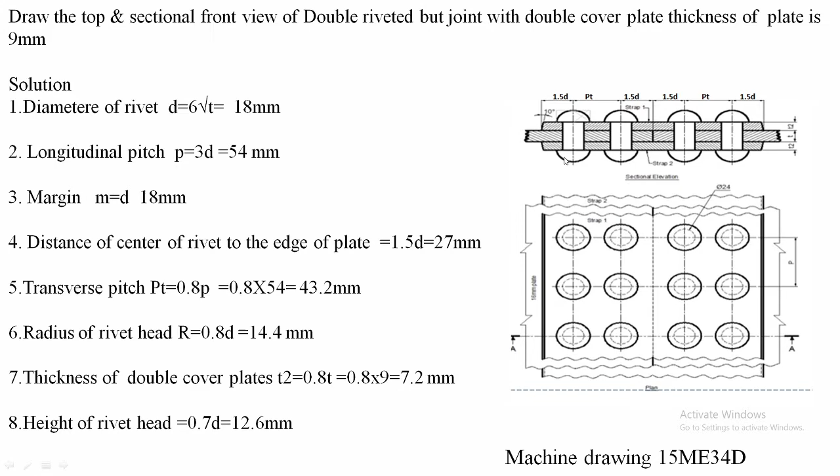The remaining things, such as the diameter and the distance from the center of the rivet to the edge of the plate, 1.5 d, remain the same. So let me discuss how to do it in the drawing sheet. Start with the center line. Now you have to draw the 1.5 d distance. This is the center of one rivet here. So 1.5 d, you draw another line here. That is the distance from the center of the rivet to the edge of the plate from the first rivet. So I draw a line at distance 1.5 d, that is 27 millimeter in our problem.

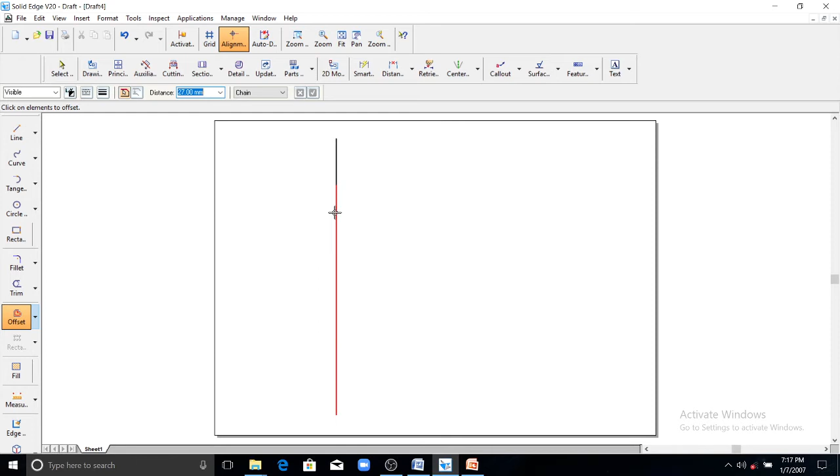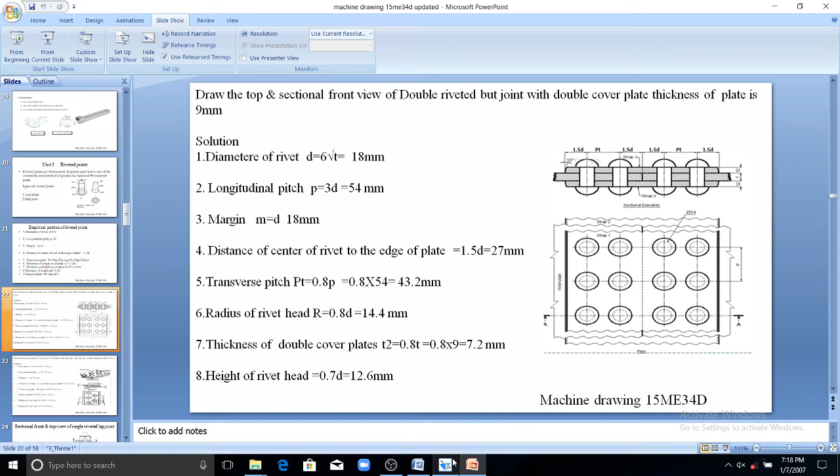From this center you need to draw another line at a distance PT, that is the center of the second rivet in the same plate. So draw another line at a distance PT, that is 0.8 p. We got it as 43.2 millimeter. So 43.2 millimeter, like this line here. Now after that, another 1.5 d distance here, that is 27. So this will complete one side of the plate.

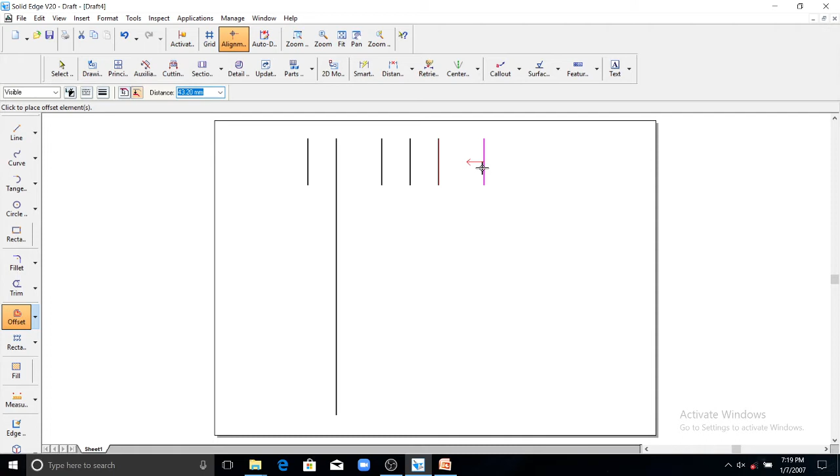So the next plate will start from here. The distance from here to the next rivet center is 1.5 d. So offset it by 1.5 d, 27 millimeter. This line, this side, and after that you have the PT distance. This is the center of the second rivet here, and another center at a distance of 0.8 times the pitch, that is 43.2 millimeter, you can see here. After that, draw another line at a distance of 1.5 d, that is 27 millimeter.

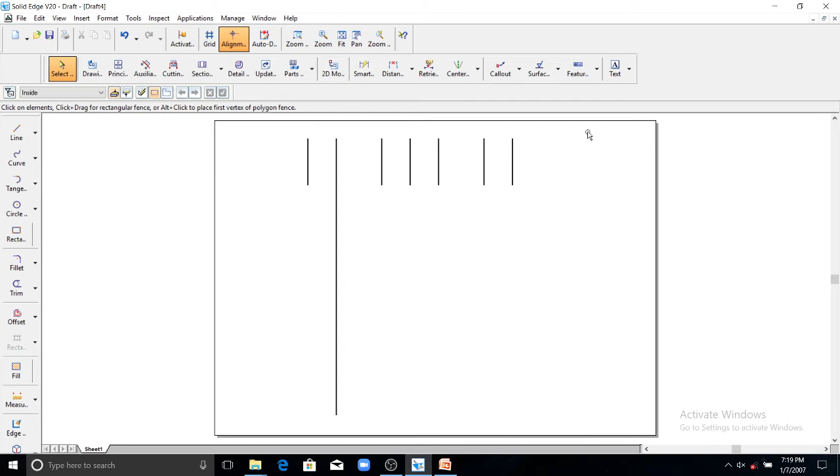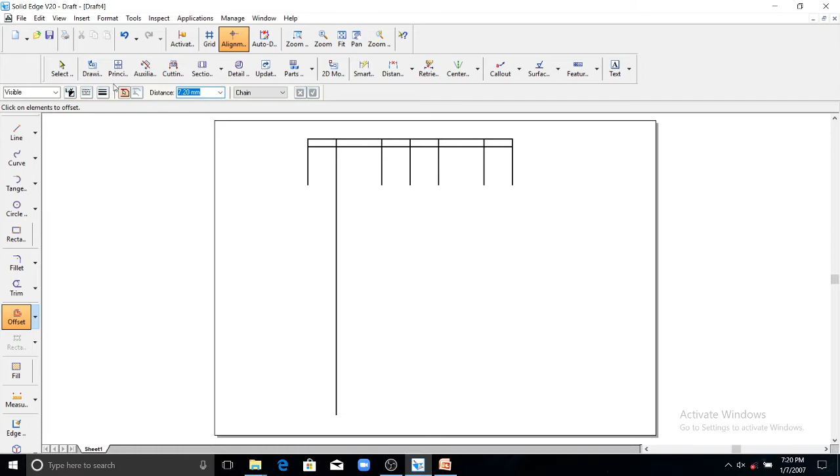Now the thickness of the plate T2, start drawing this thickness. The first thickness, of the cover plate T2, we got as 7.2 millimeter. The plate is 9 millimeter, so 9 millimeter here. After that, the bottom cover plate, 7.2 millimeter.

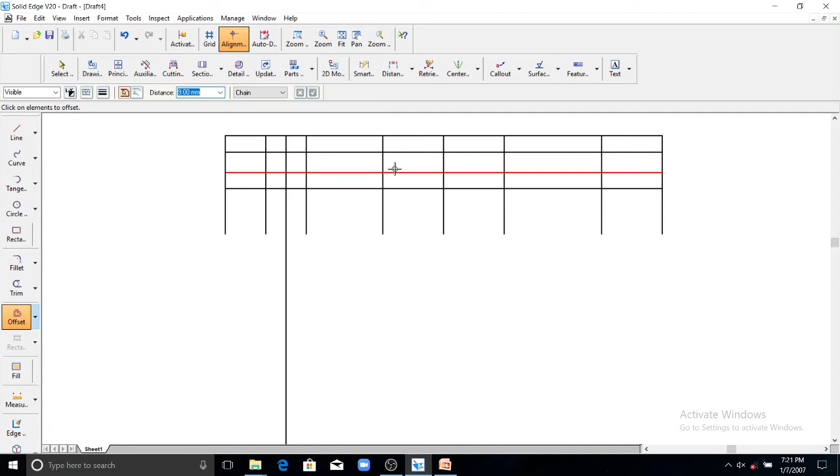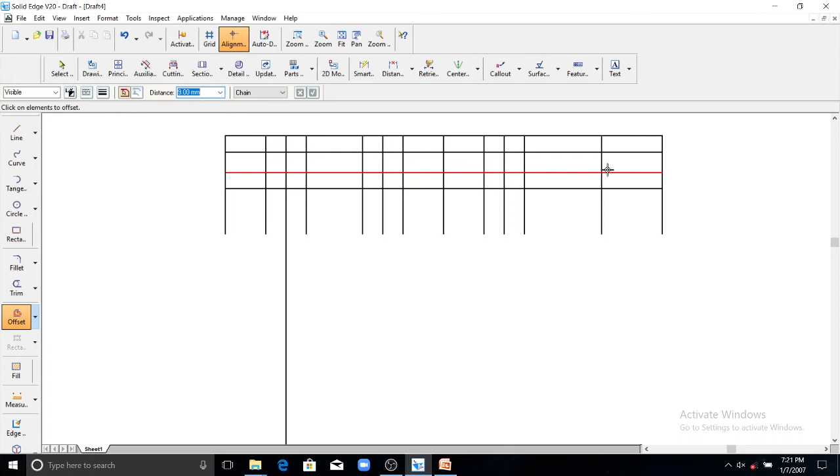Now concentrate on drawing a rivet. The diameter of the rivet is 18 millimeter, so 9 mm from the center here. Similarly, this is the center. So this is the rivet center, and another center here. So these are the 4 rivets: 1, 2, 3, 4 rivets here.

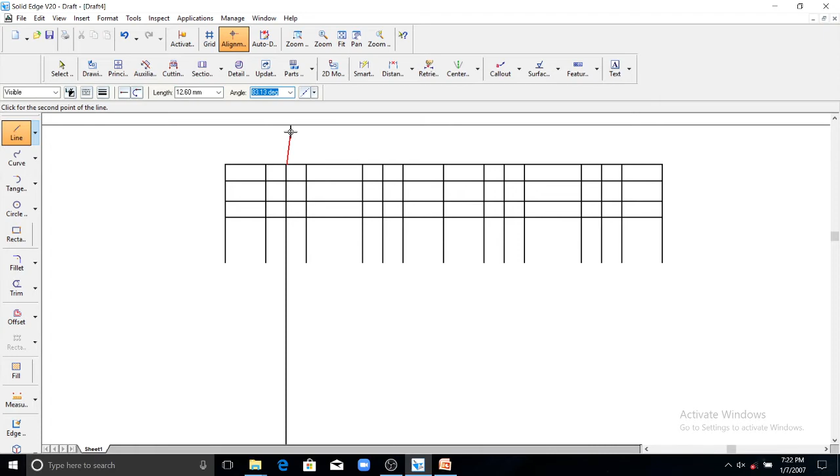Concentrate on drawing the diameter of the snap head as discussed earlier. Take the height of the rivet head, which we got as 12.6 mm here, and this is 14.4 mm. Now join the diagonals of this. Now you need to draw the bisector of this line and extend that bisector till it touches the center of this rivet. So draw the bisector.

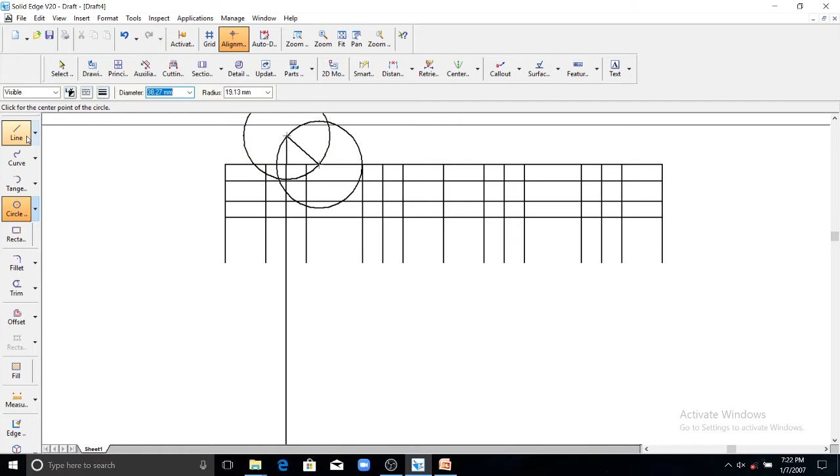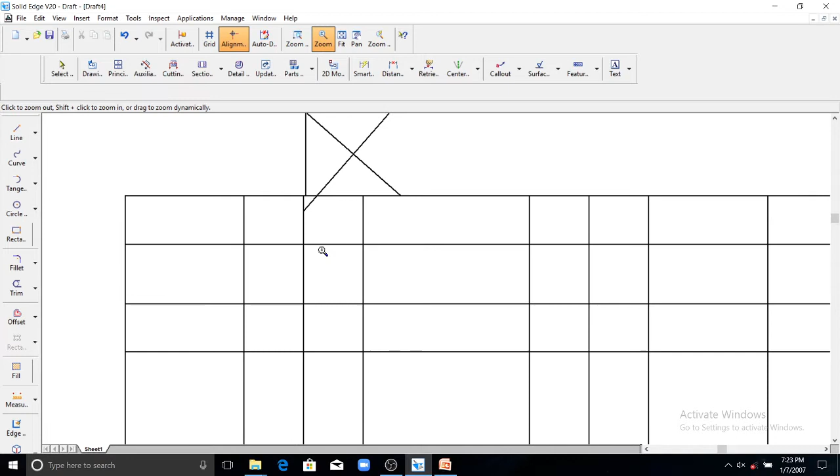So this is the bisector. So it has to touch this center of the rivet. So this is the center for drawing the radius of the snap head. We draw an arc of radius 14.4 mm here. Remaining portion, you trim it.

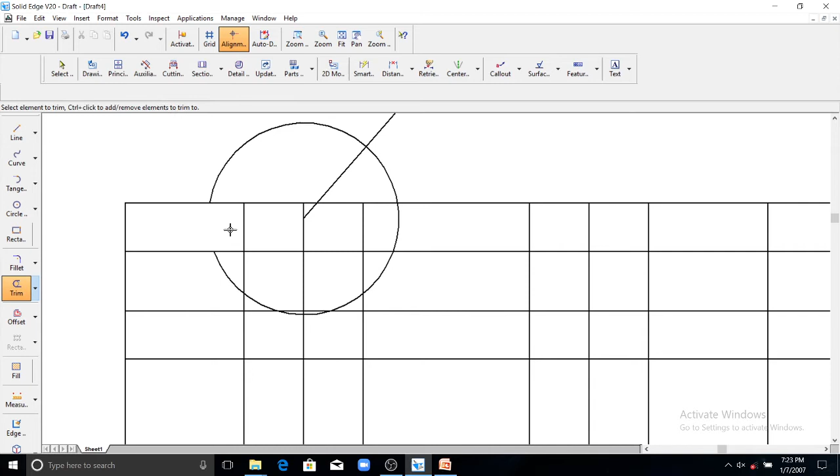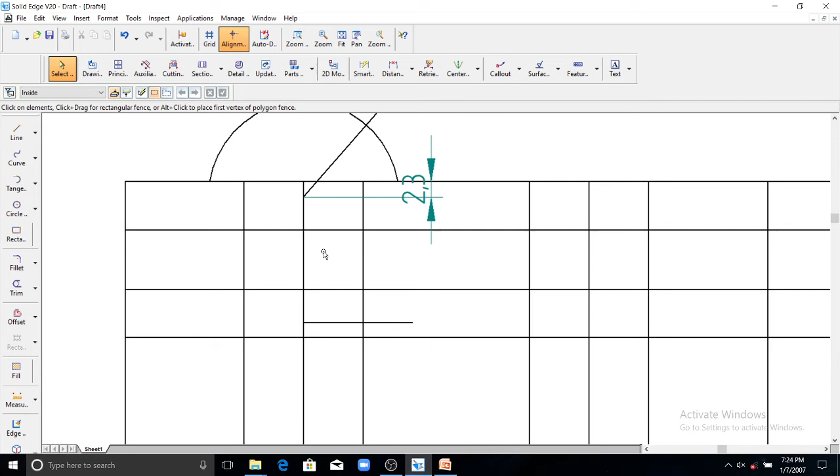Now you measure this distance here, from this to the center, 2.3, and leave here 2.3 mm. This is the center for the bottom rivet for drawing the radius of the bottom snap head. So from this center, draw the arc of radius 14.4 millimeter.

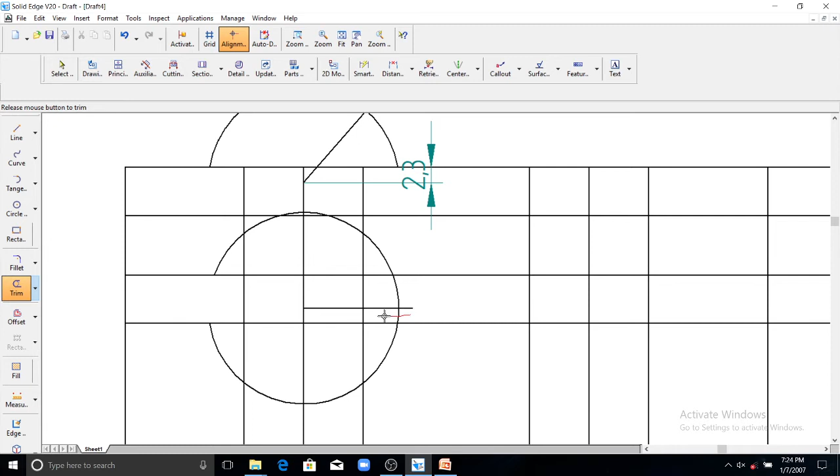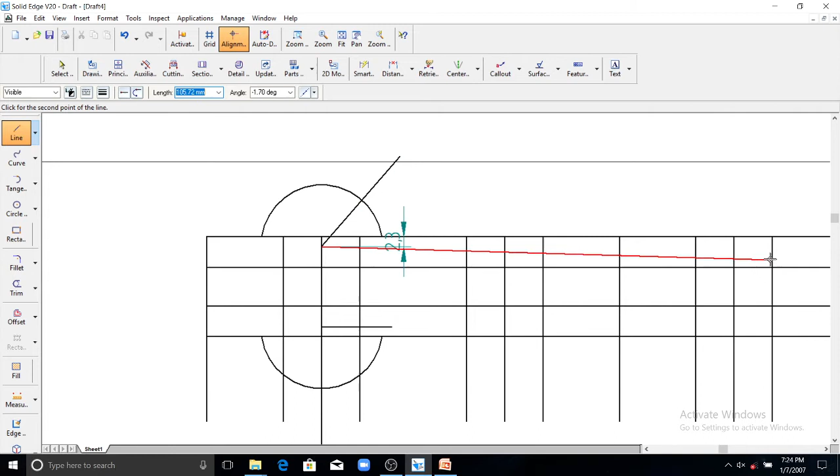The remaining portion. So this is the snap head for the first rivet. Similarly, you need to draw the snap head for all these 4 rivets. So I will transfer the centers here to all the rivet centers. So now here also I will transfer this so that you can directly draw the radius.

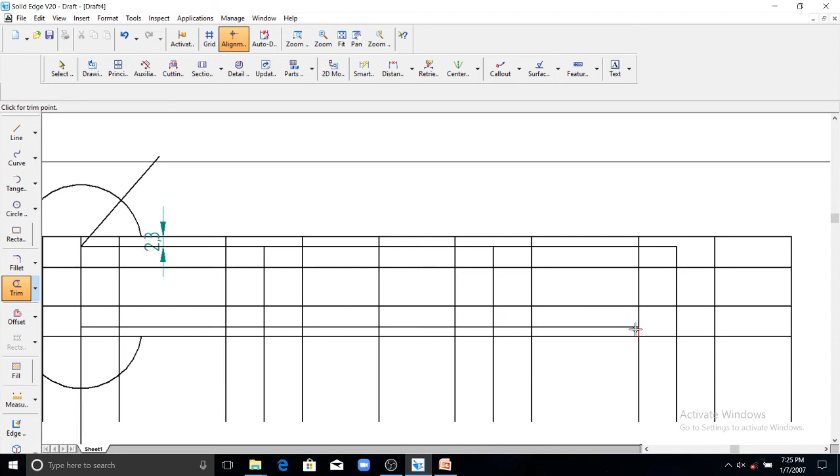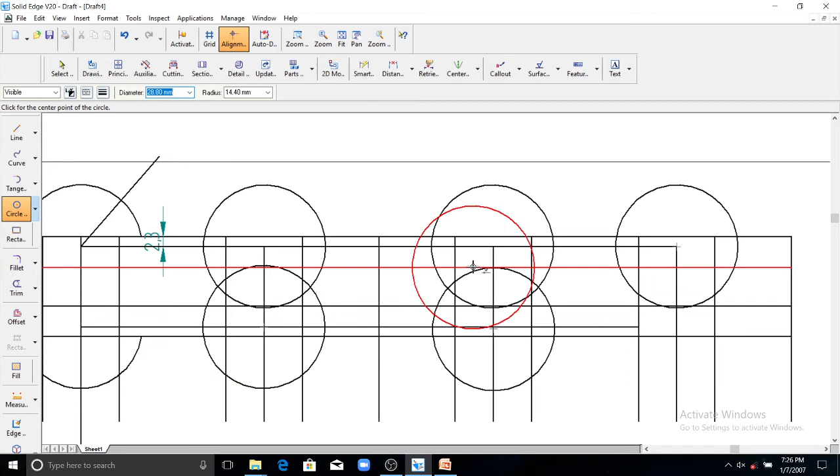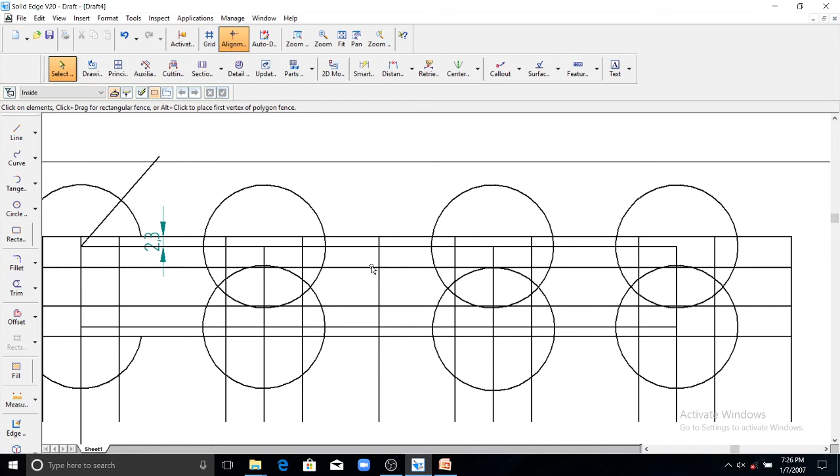Radius. Similarly here, similarly here, here and here. This is the new center here. 14.4 mm radius arc. Remaining portion we erase it.

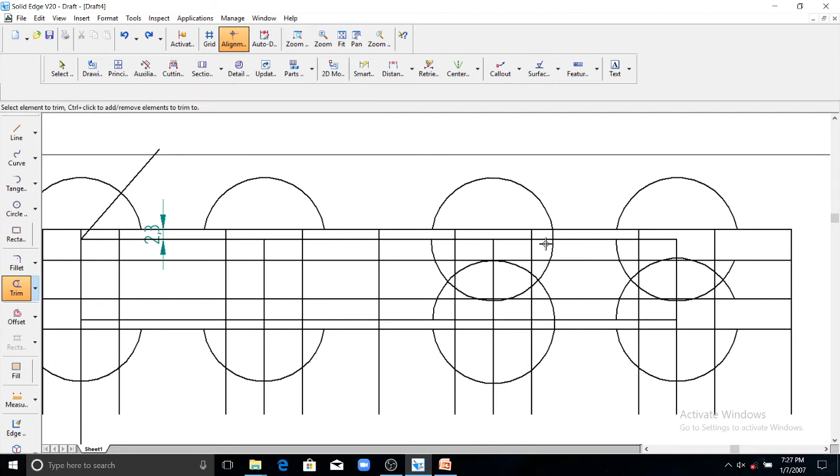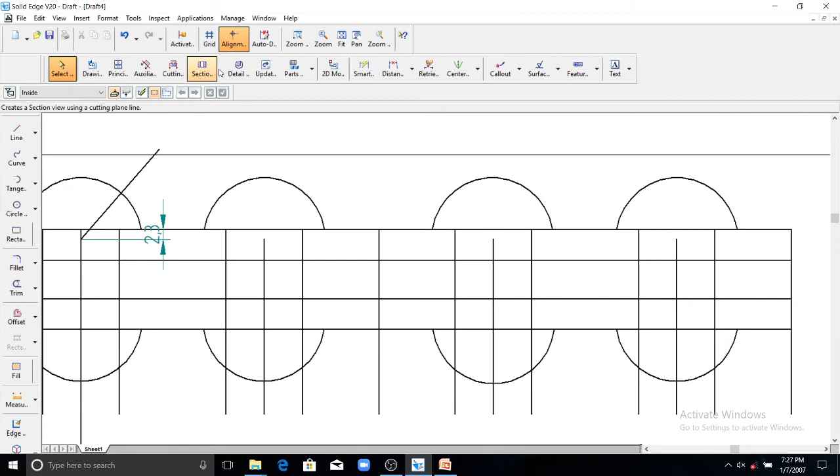Now erase all the construction lines. So this completes the rivet in the front view. You can see here. Now draw the 10 degree taper line here. Similarly draw the 10-degree taper on this side.

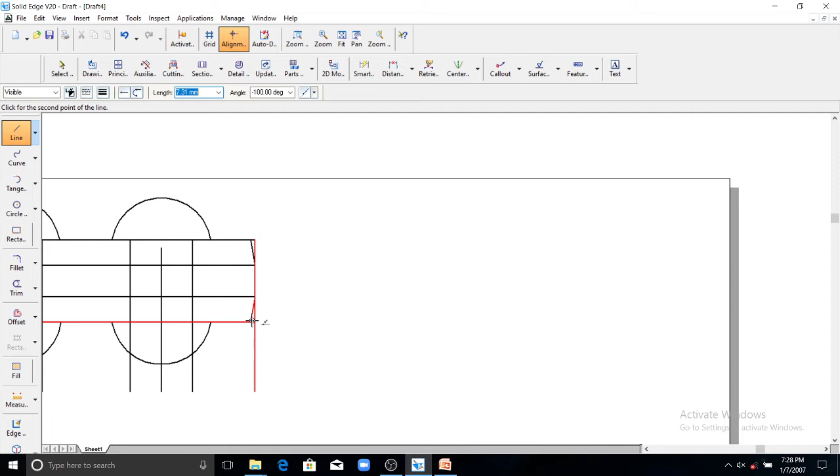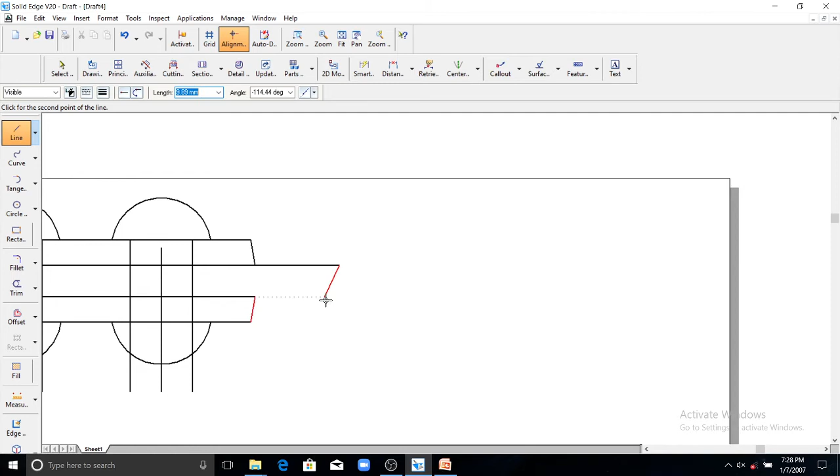Remaining portion, erase it. So this actual plate, you can draw it for any length. So this is also the actual plate. You can draw it for any length.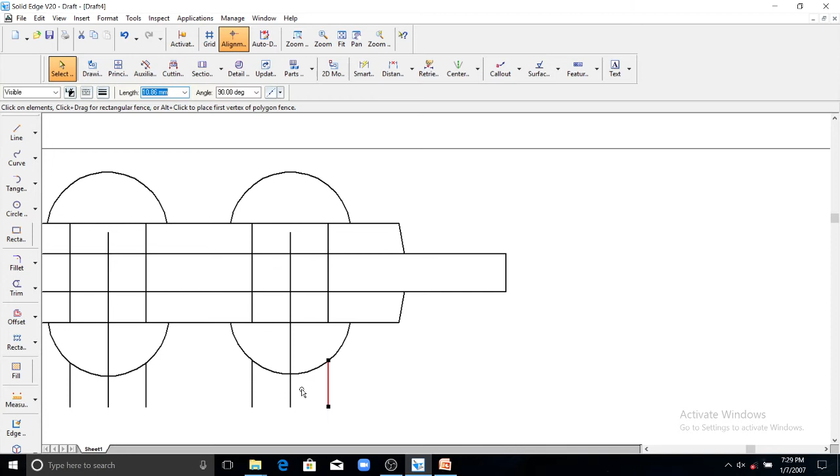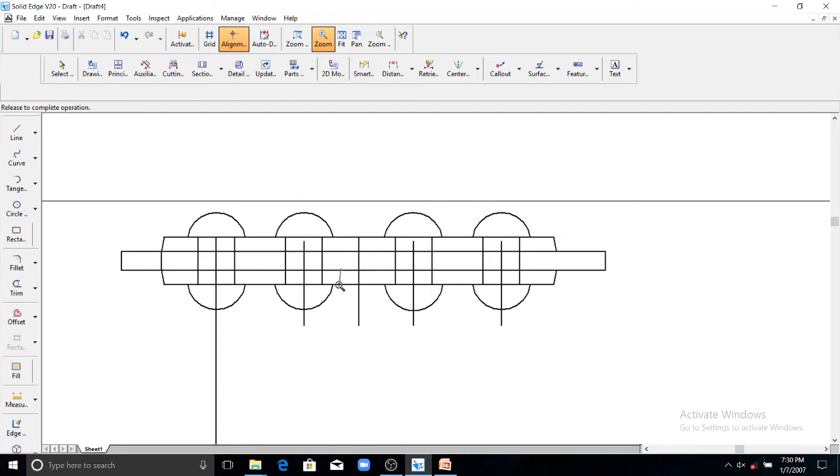Erase all the construction lines. So this completes the front view. Now you have to hatch the different plates. So this is one cover plate.

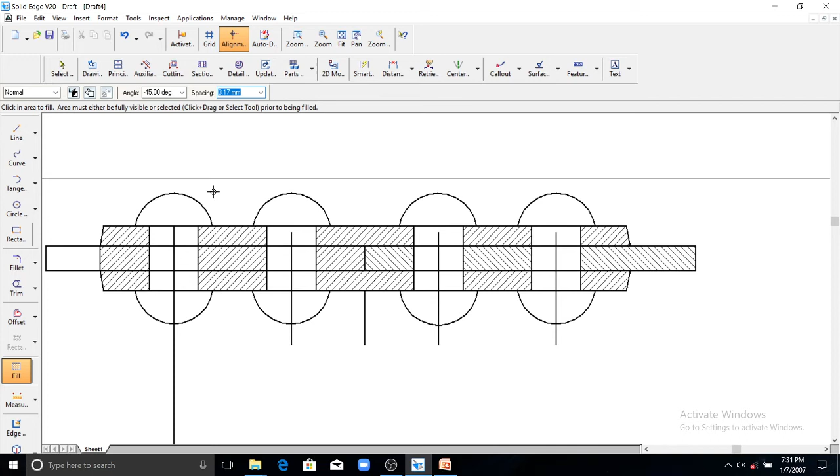Top cover plate, and this is the bottom cover plate. Two cover plates you can see here. So this you need to hatch at a different angle. This is one plate, so this you have to hatch at a different angle. This is the second plate. So these two plates are joined by using these four rivets with this cover plate. So this completes the front view.

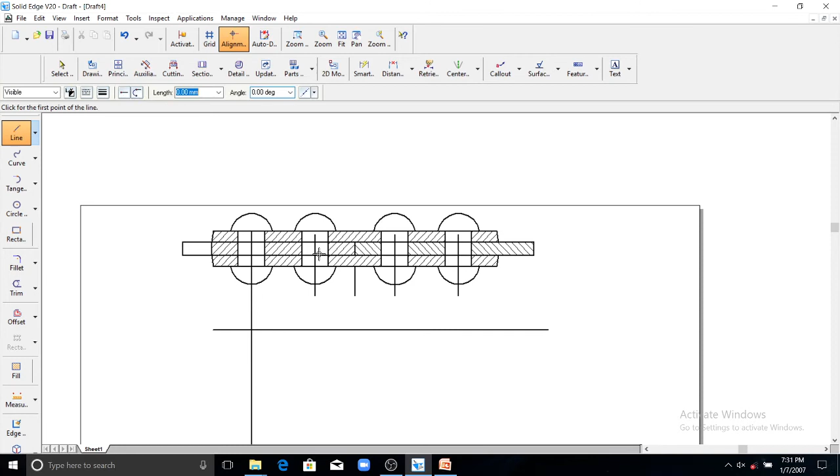So now you have to concentrate on drawing the top view. Anywhere here. So a lot of centers here. The distance to the second center in the top view is pitch P, that is 3D. That will become 54 millimeter. You can see here, 54 longitudinal pitch. So draw the next center at a distance of 54 from this center line.

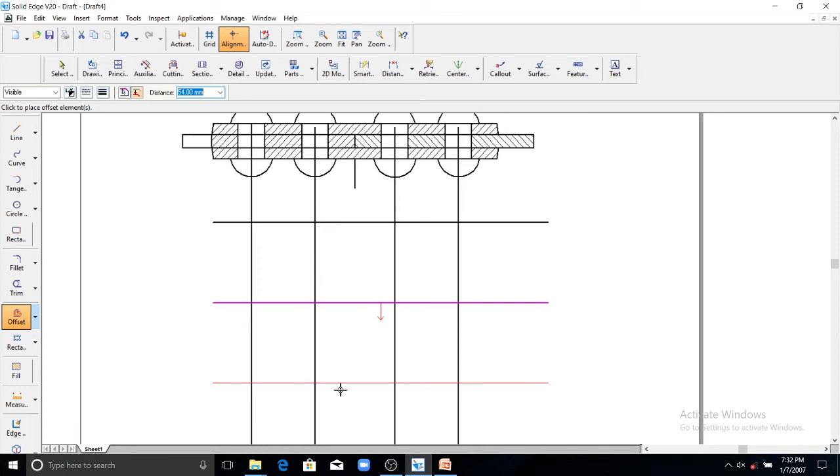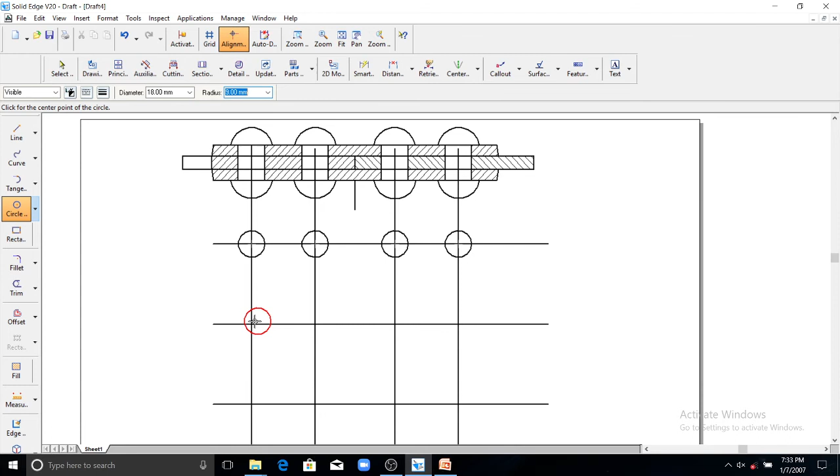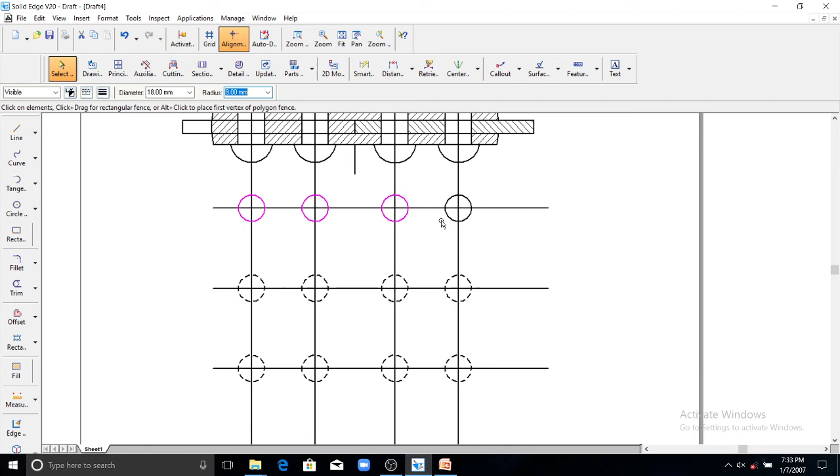Two circles, you can see in the top view two circles. First circle is the bottom snap head diameter circle, another one is the diameter of the rivet. This diameter of the rivet is invisible, that's why you have to draw it in a dotted line. Now the snap head diameter, the radius is 14.4, or else you can project this here. Draw the circle.

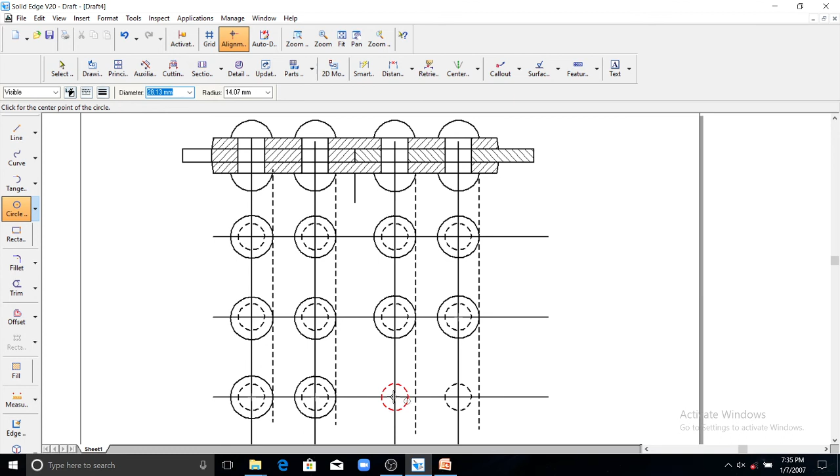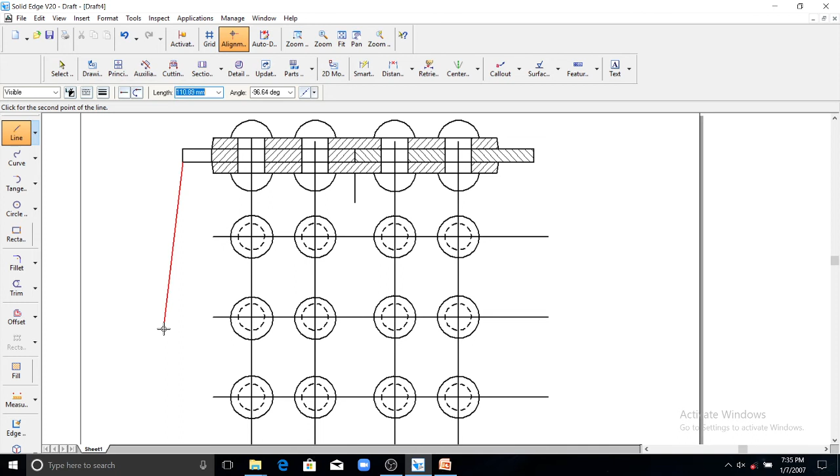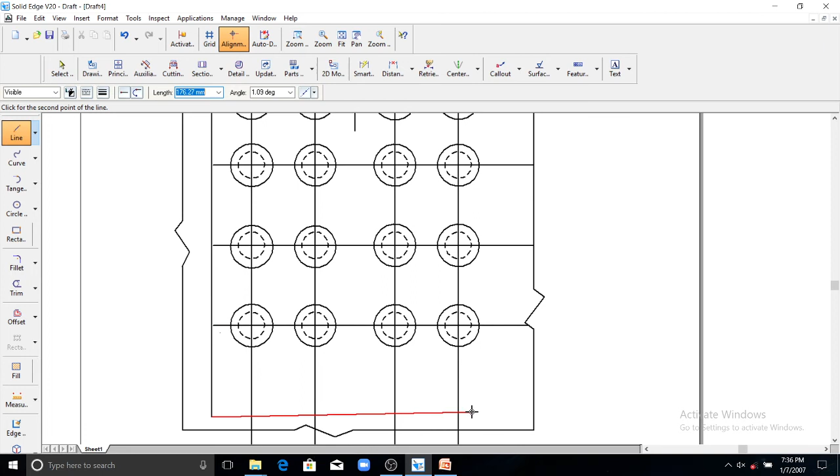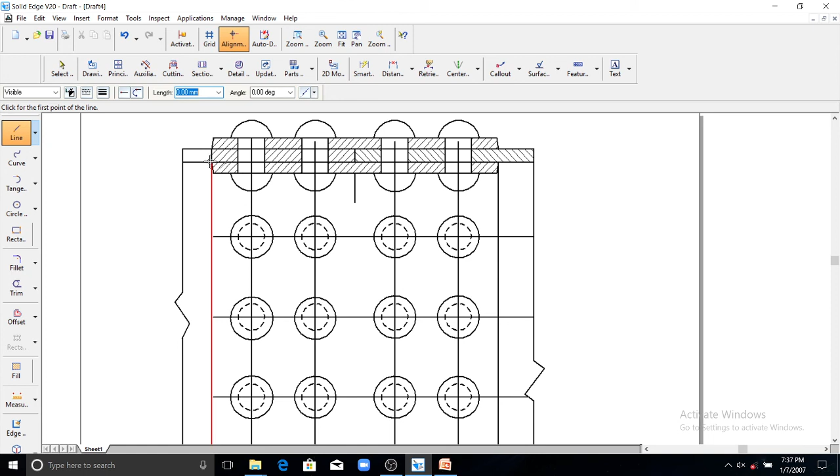Draw the projection line here. Complete this joint. So two lines here, one is a straight line, another is the 10-degree taper line.

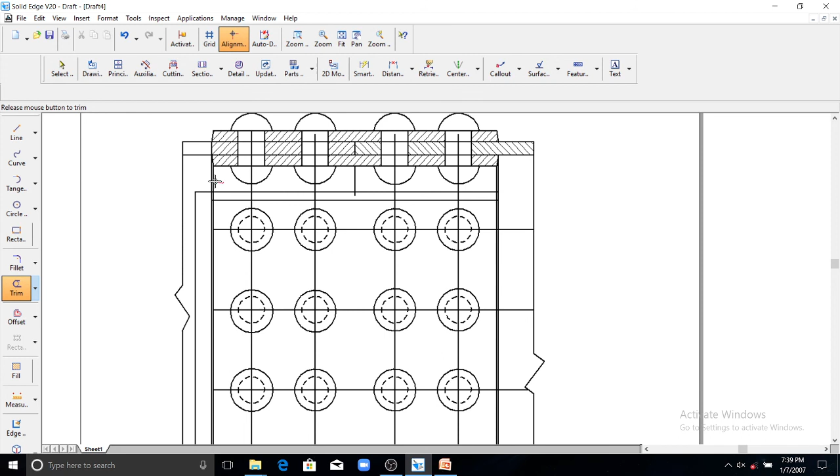Here is the remaining portion. This is drawn to draw the projection here. These are not required at all. So erase these unwanted lines. So in the center you can see one line in a dotted portion. So this is the center line.

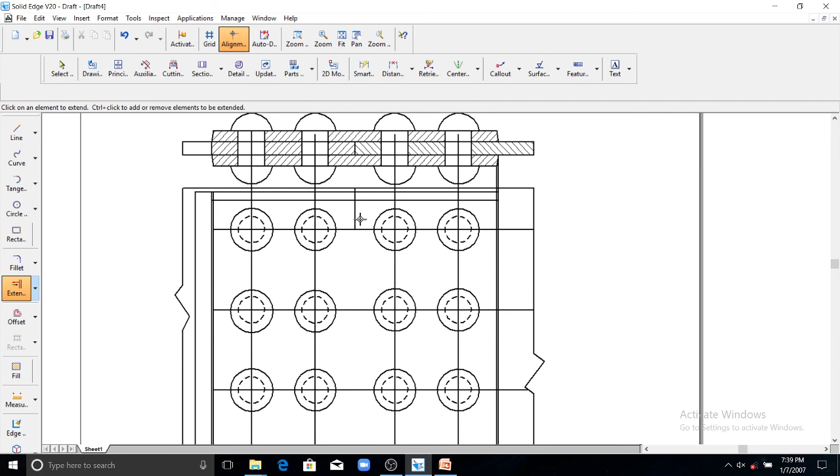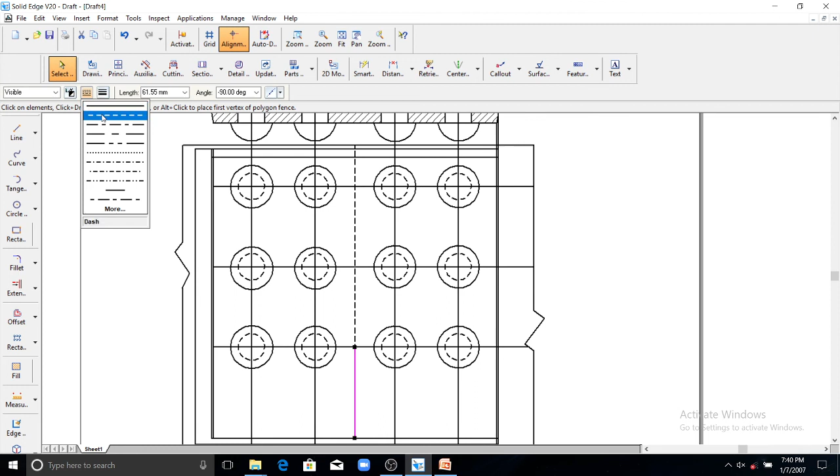You need to draw it in a dotted line since it is invisible from the top view. So this line is the joining of the two plates, the actual plates. So this completes this model. So we need to do it in a drawing sheet in a similar way to what I have drawn here. So dimensioning, the important dimensions you can see here.

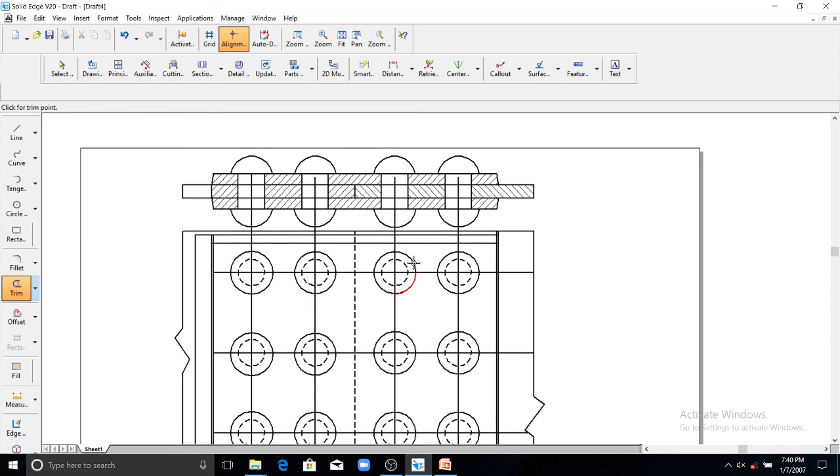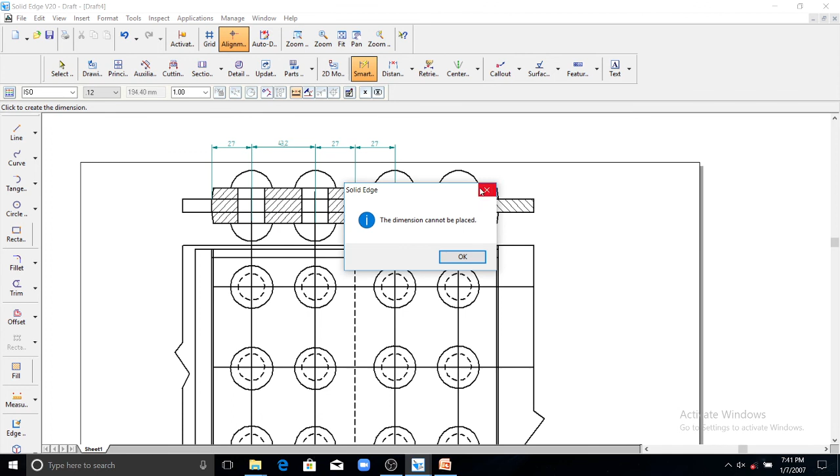The distance between this center to this center is PT, that is 43.2 millimeter, and the distance from this center to the edge of the plate is 1.5 D, that is 27 mm in our case. This is 1.5 D distance and this is 1.5 D. And this is also 1.5 D, and the distance between two rivets is PT, 43.2 millimeter, and this distance is 27, 1.5 D.

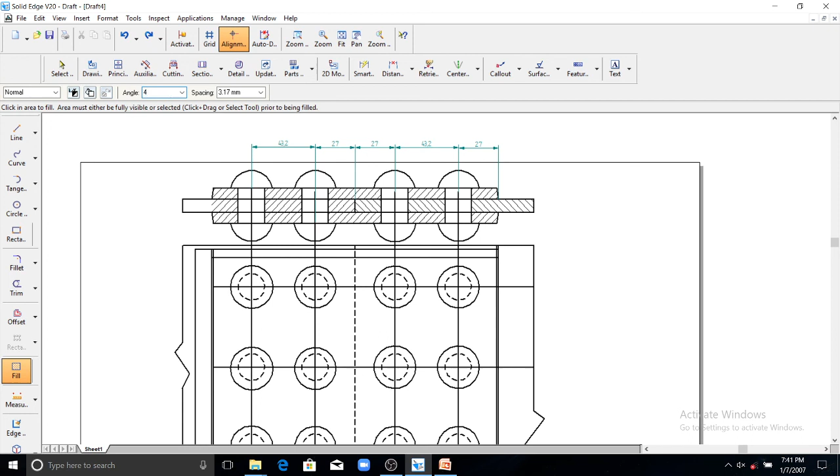Distance is 1.5 D. So this is the longitudinal pitch P, 3 times the diameter, that is 54 millimeter. Similarly, this is also pitch P, 54 millimeter, 3 times the diameter.